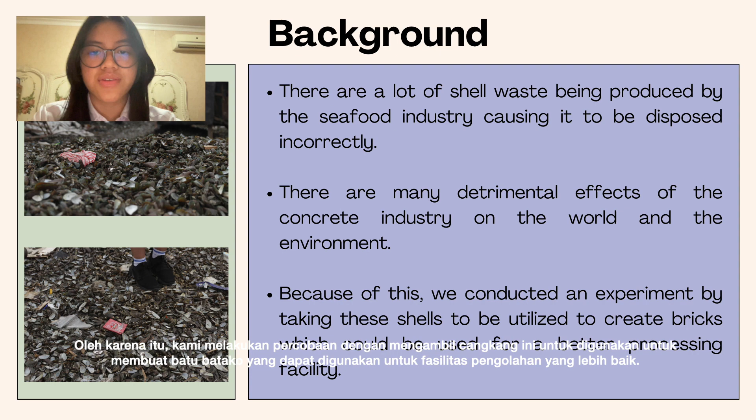The issues and problems we have chosen to analyze in this research are: seashells have become one of the waste materials that are rapidly piling up, especially in coastal areas and countries where seafood consumption is very high. The disposal of said used seashells in landfills and/or public waters causes many environmental problems. And not to mention, the concrete industry itself also has a variety of negative consequences on the environment.

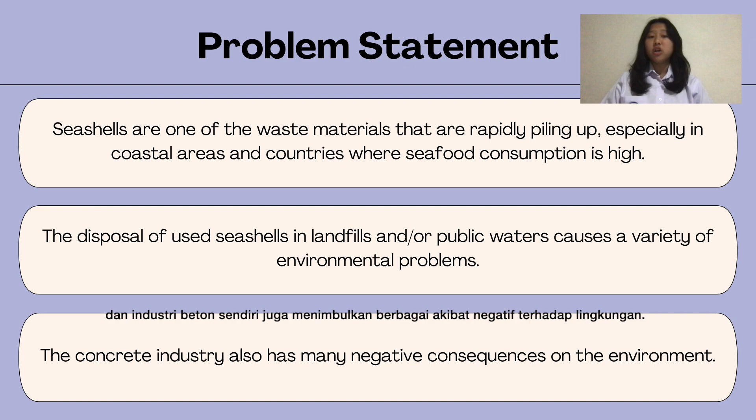The purpose of our research is first to examine the materials within the Asian green mussel shells and determine whether it is a suitable substitute for the manufacturing of bricks, to investigate the difference in qualities of the two bricks, to examine the amount of shell waste that could be reduced in Cilincing, North Jakarta, Indonesia, and lastly, to find the production cost to make waste mussel shell bricks as compared to that of the concrete bricks.

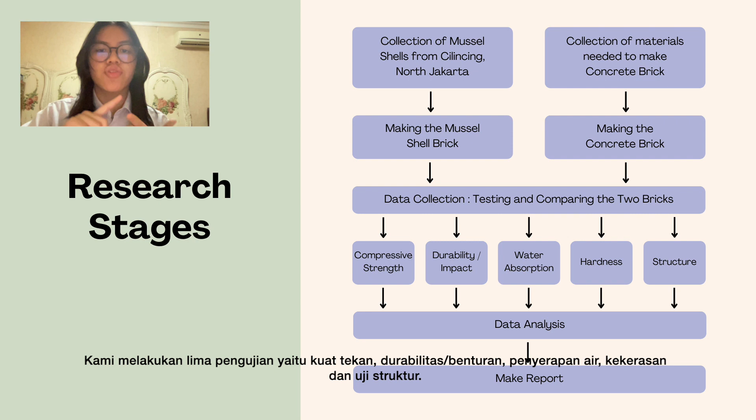For the research stages, first we collected the necessary materials needed, including the green mussel shells. Then we started to make both bricks and collected the data by comparing and testing the two bricks. We conducted 5 tests, which are the compressive strength, durability or impact, water absorption, hardness, and structure tests. After that, we analyzed the data and made a report on it.

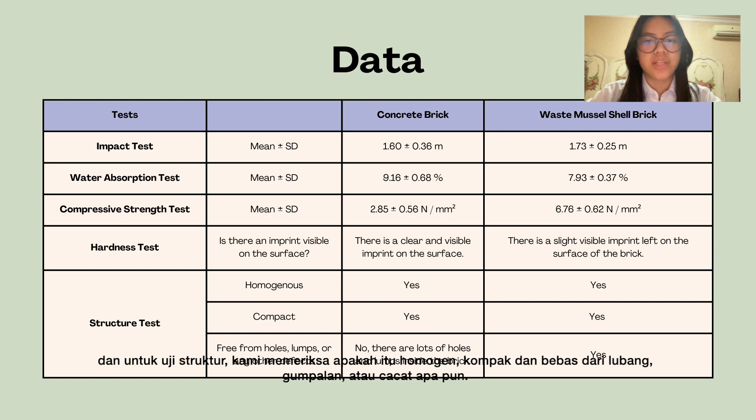This is the data we collected after conducting the 5 tests. We calculated the mean plus minus the standard deviation or the range of the data for the impact, water absorption, and compressive strength test. For the hardness test, we checked if there were any visible imprints on the surface, and for the structure test, we checked if it was homogeneous, compact, and free from holes, lumps, or any kinds of defects.

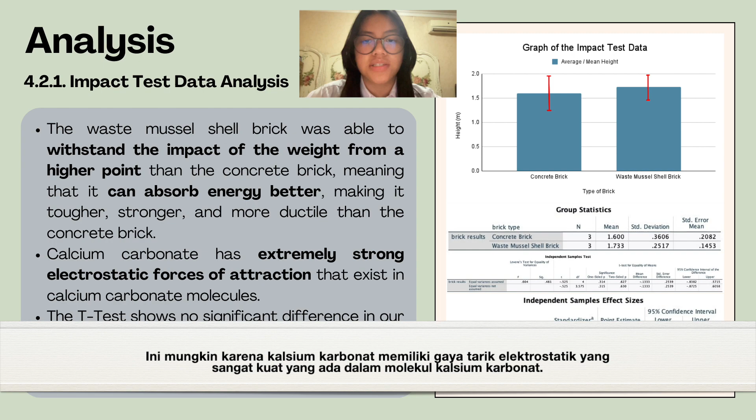The results of the impact test show that the waste mussel shell brick was able to withstand the impact from a higher point than the concrete brick, which is not proven in our t-test. This means that it can absorb energy better, making it tougher, stronger, and more ductile than the concrete brick. This may be due to the extremely strong electrostatic forces of attraction that exist in calcium carbonate molecules.

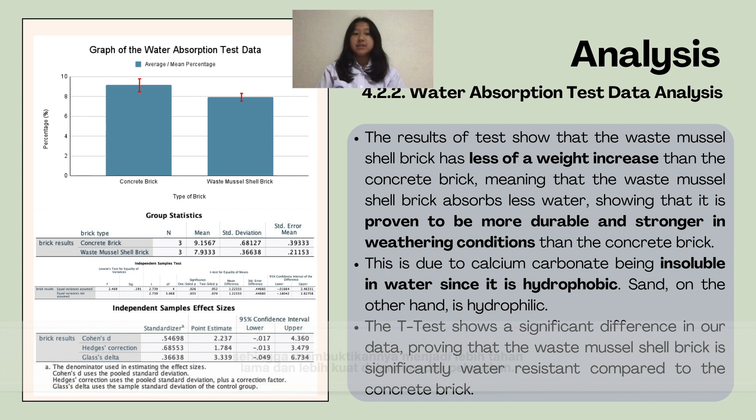The results of the water absorption test show that the waste mussel shell bricks have less of a weight increase than the concrete bricks, meaning that the waste mussel shell bricks absorb less water, which is also seen through our t-test, thus proving it to be much more durable and stronger in weathering conditions. This is due to the calcium carbonate found in the waste mussel shells being insoluble in water since it is hydrophobic, meaning it repels water.

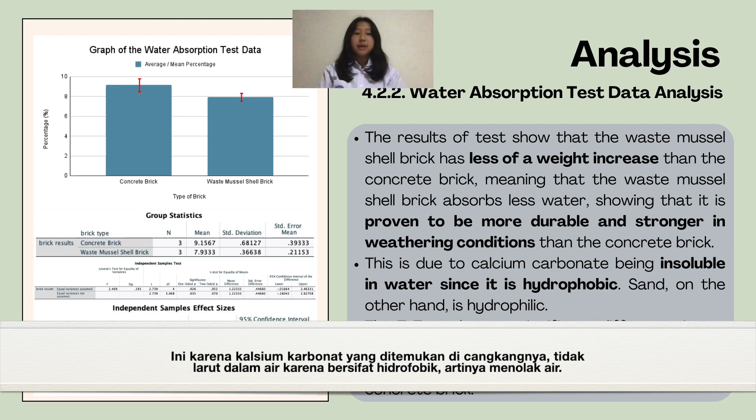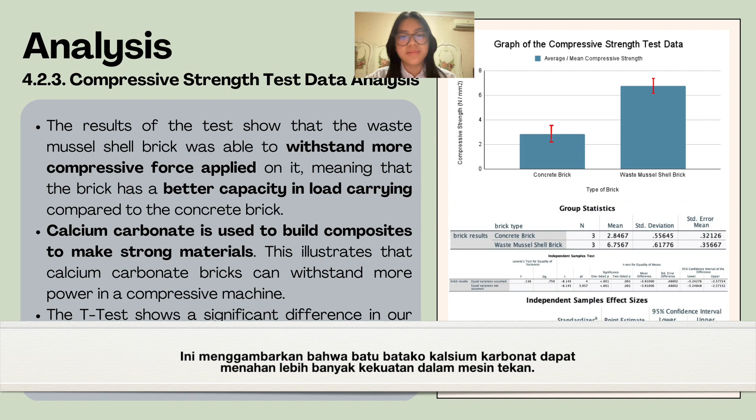The results of the compressive strength test show that the waste mussel shell brick was able to withstand more compressive force applied on it, as shown in our t-test. This means that the brick has a better capacity in load carrying compared to the concrete brick. This is due to calcium carbonate being used to build composites to make strong materials. This illustrates that calcium carbonate bricks can withstand more power in a compressive machine.

When doing the hardness test, there was a clear and visible imprint on the surface of the concrete brick, whereas on the waste mussel shell brick, there is only a slight visible imprint left, meaning that it is much harder. This is due to the brick containing calcium carbonate, which is relatively harder and stronger since its structure has stronger bonds compared to that of sand.

In the structure test, we were able to observe that all 3 concrete bricks were homogeneous and compact, but there were lumps and holes found. Meanwhile, all 3 waste mussel shell bricks were homogeneous, compact, and also free from lumps, holes, or any other possible defects. As such, the waste mussel shell brick is a well-structured brick, while the concrete brick is not.

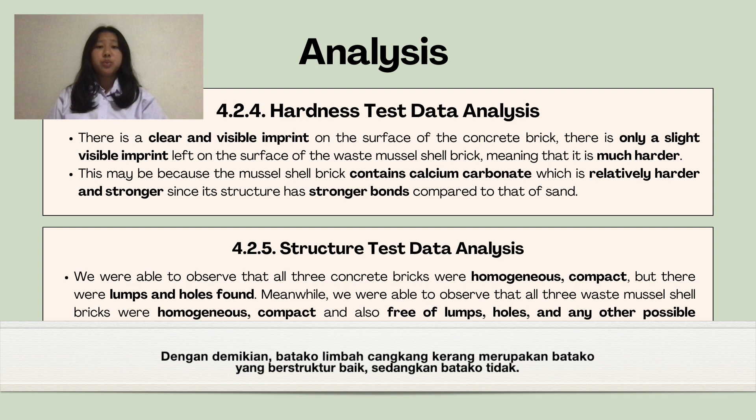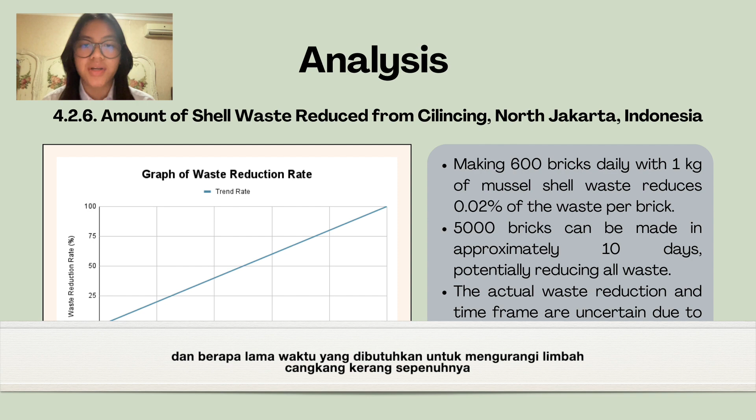There are approximately 5 tons of shells laying on the grounds of Cilincing. Making 600 bricks daily with 1 kilogram of mussel shell waste reduces 0.02% of the waste per brick. 5,000 bricks can be made in approximately 10 days, potentially reducing all waste. Though it is uncertain as to how much waste could be reduced in a day and how long it would take to fully reduce the mussel shell waste, as the number of waste products constantly increases. Taking into consideration the lasting period of